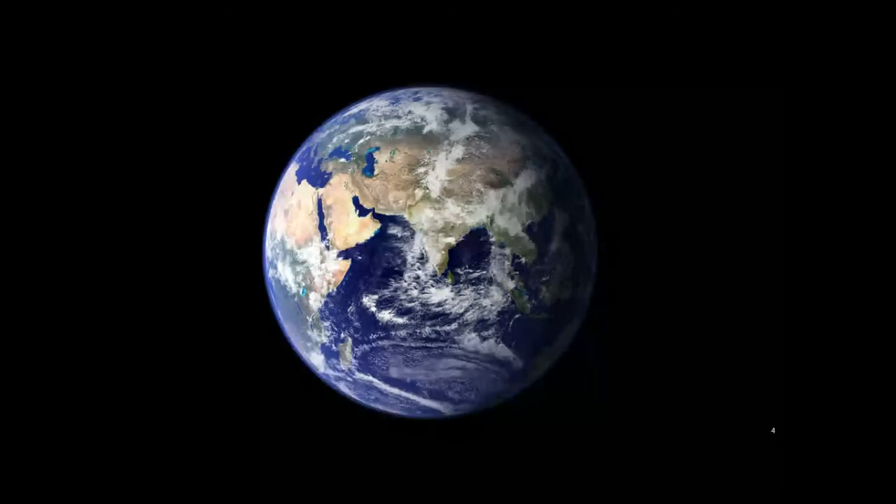So this is our planet in the solar system. It has the perfect conditions for life to arise, but it has not always been this climate here. In fact, there's a natural cycle between warm periods and icing periods. At 20,000 years ago, south of Europe had the climate of northern Norway today, and our ancestors were basically hunting reindeers. So you know this is the natural cycle between these changes of temperature.

Today, nowadays, we are facing a warming period, and the global scientific community is witnessing a fast rise in the Earth's temperature, since the industrial revolutions. So there is a link between our activities, mainly use of fossil fuels, and our emissions in the planet. But if we imagine Earth as a system, it can regulate its temperature, it has the ability to auto-regulate itself, like a negative feedback would do.

But only when there are minor disturbances. In the climate change and global warming, at some point the disturbances begin to be so high that the system becomes unstable, and they can have catastrophic impacts like pack ice melting, rise of ocean temperature, ocean acidification, the loss of regulation of CO2, and also the de-icing of permafrost.

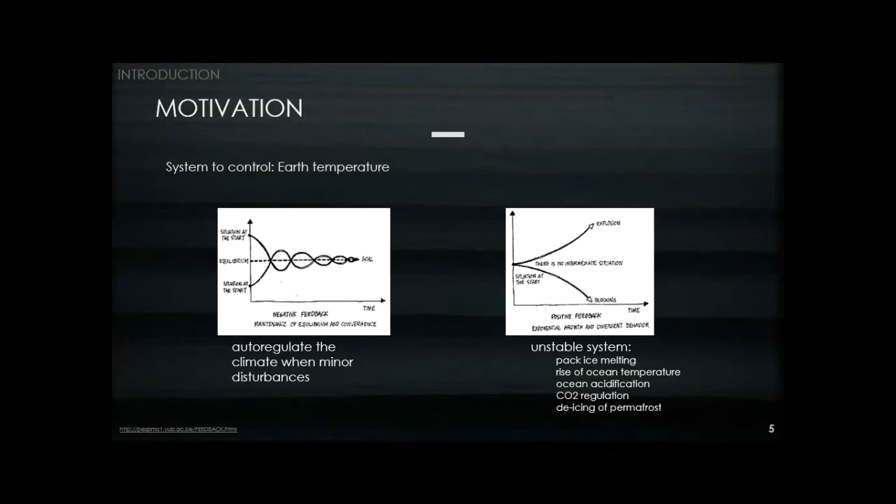The first one is sufficiency — don't use the energy you don't need. The other one is efficiency — you have to think of more efficient systems. And the other one is use renewable energies. So with these three principles, you can engage an energy transition.

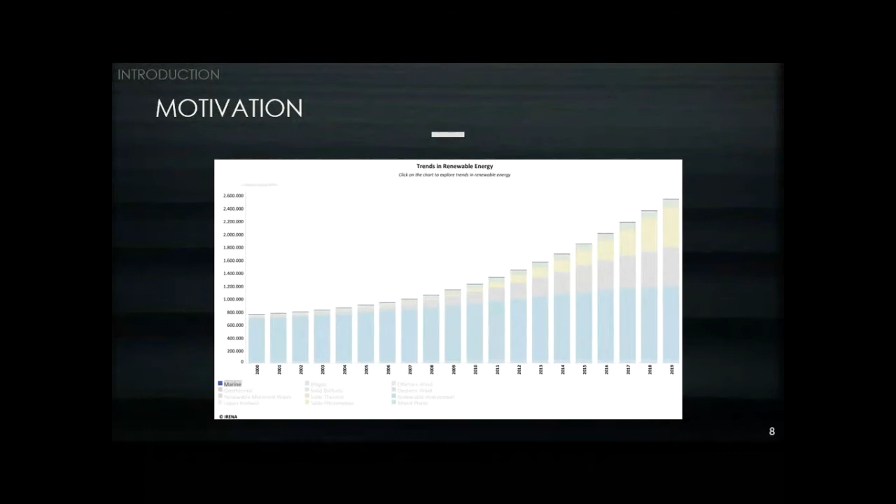So here, I think innovation is still ongoing, but it's more incremental innovation, and I think there is space for research and development in marine energies. So there is motivation to work in that field. In these marine energy technologies, we can think of tidal energy, wave energy, osmosis, ocean thermal energy.

The one I wanted to focus my work on is wave energy, because it represents a huge amount of power. The resource that is accessible in Europe can represent 3 times the European power consumption.

We know there's a huge amount of energy, and mankind has always tried to protect itself from ocean waves, building harbors or making more robust ships. So there are a lot of challenges here. First, we want to produce power, but it is usually associated with costly operation and maintenance. The devices to capture power have to survive winter storms, and they are also subject to corrosion and biofouling.

Now moving on to some generalities. What are ocean waves? Wave energy is a sort of solar energy, because the sun creates wind and the wind creates the wave. Here you see a picture of a swell wave, created by wind blowing over a large surface area far away from the coast. These long crested waves come to shore quite regularly. On the opposite, we see wind waves, which have a much more chaotic aspect.

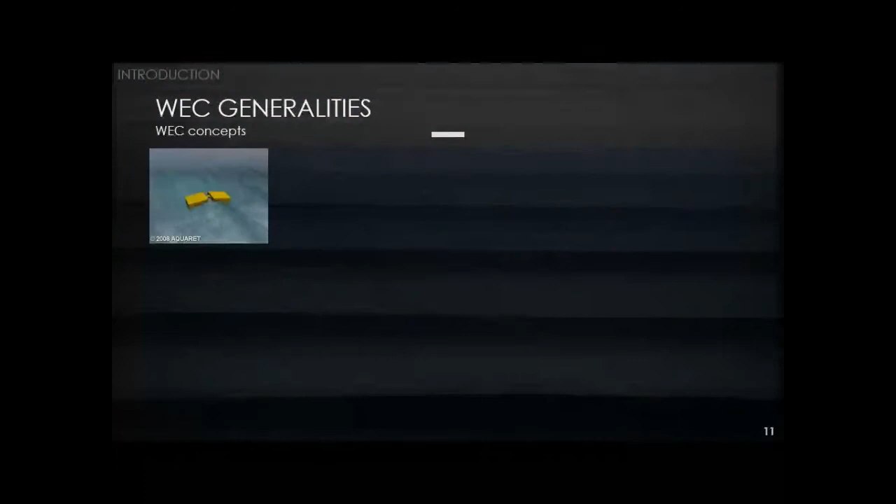There are several concepts that have been developed to capture this energy. You see first the attenuator, a flap type, a point absorber, one which relies on pressure differentials, pitching devices, overtopping devices, and other more innovative ones relying on a deformable rubber material. The one I wanted to focus my work on, due to its simplicity and robustness, is the oscillating water column. In this picture, you can see how it behaves.

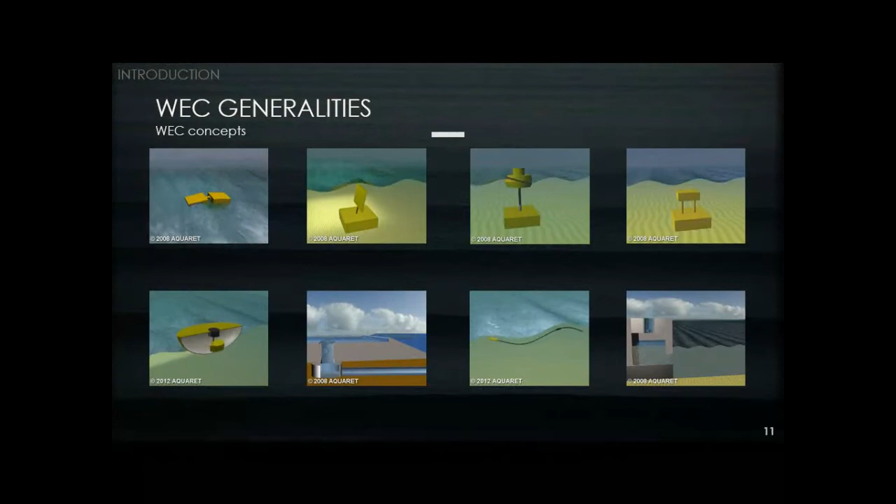What I wanted to state with these different concepts is that wave energy is not converging into a winning technology, like it's been the case in wind energy, where we now have the three blade horizontal axis turbine, which allows cost effectiveness and reliability. So there is still room for innovation here.

Now, moving on to the scope of that research, I wanted to introduce some concepts here. In wave energy conversion modeling - how the devices move due to ocean waves - we rely on concepts of hydrodynamics, which express the motion of the device and the several forces in presence, like the excitation forces, which is the one felt by the body due to an ocean wave, also radiation forces and hydrostatic forces.

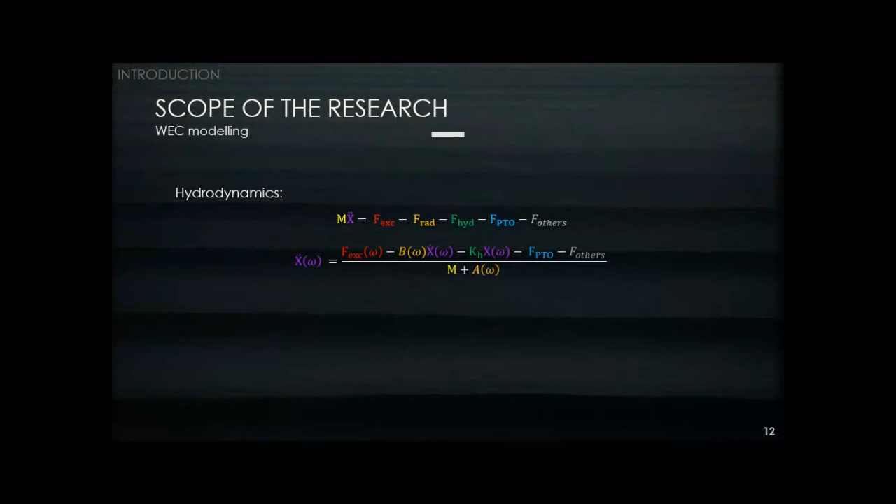There's also the power takeoff force, which is the one we actually want to capture and convert into useful power, and other forces which can be related to mooring forces and drag forces. This second equation is the differential equation of motion which relies on all of these forces.

What's important to notice here is a device has its own hydrodynamic coefficients. Here you can see its response in the excitation components, both amplitude and phase, and also added mass at infinity and radiation damping. These coefficients can be obtained by using hydrodynamic solvers like WAMIT, NEMOH, or AQWA.

When you solve that differential equation with a 1 meter wave for several frequencies, you can extract what is called a response amplitude operator, which describes the motion of a device. Here is an example of the Mutriku frequency domain wave device.

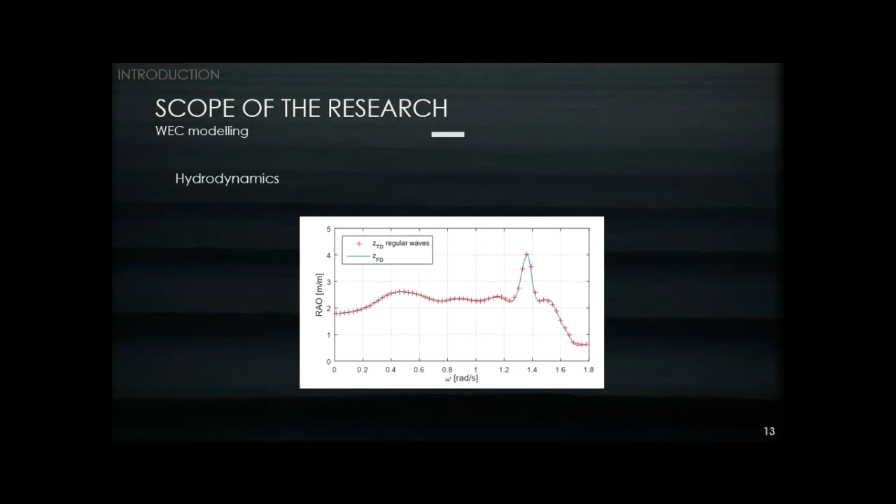Moving on to control for wave energy converters. Why do we want to control them? Well, of course, we want to extract power and optimize the energy output, but we want to do that while assuring safe and reliable operation. You can also apply control to assure good grid connection or integration of power into the power network. Earlier you saw the force we are trying to optimize, which is the power takeoff force.

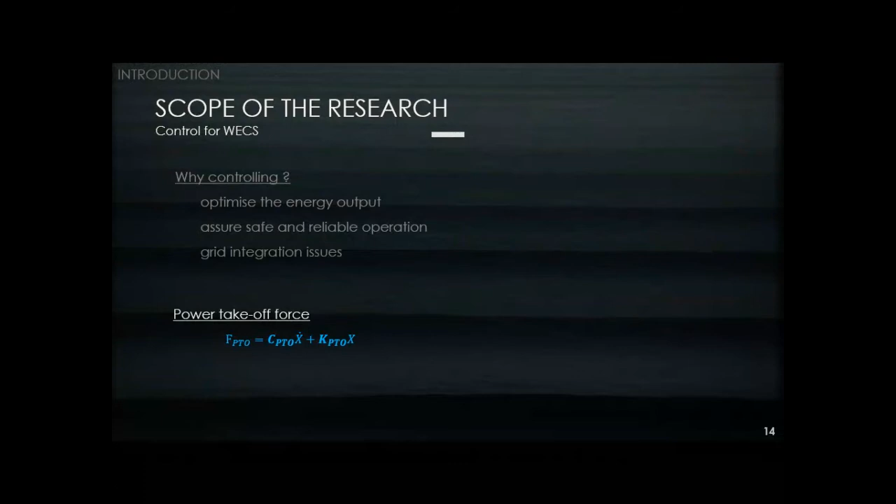It can be simplified as a damping coefficient, CPTO, proportional to the velocity, and a stiffness coefficient, KPTO, proportional to the position.

It needs a force in the power takeoff, which is able to give back energy to the system so it can change its motion and be closer to resonance condition. There's another control strategy called latching. It's phase control, and it also tries to change the motion to recreate resonance. There's also a passive approach, which is not very efficient.

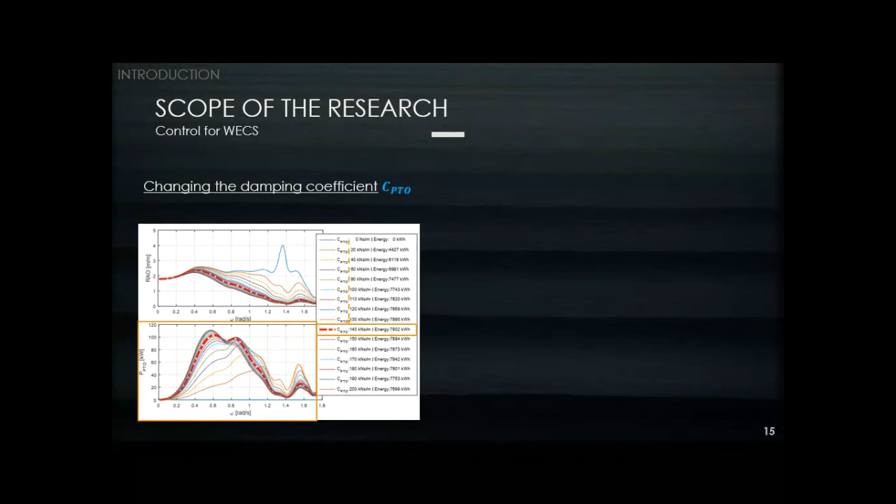What happens if we change the damping coefficient of that force? Remember the RAO of Mutriku, shown as the blue line—as you increase the damping coefficient, you decrease the motion and extract power, shown at the lower graphics. Globally, if you integrate across all frequencies, there is an optimal damping coefficient, and you can summarize this as an energy production.

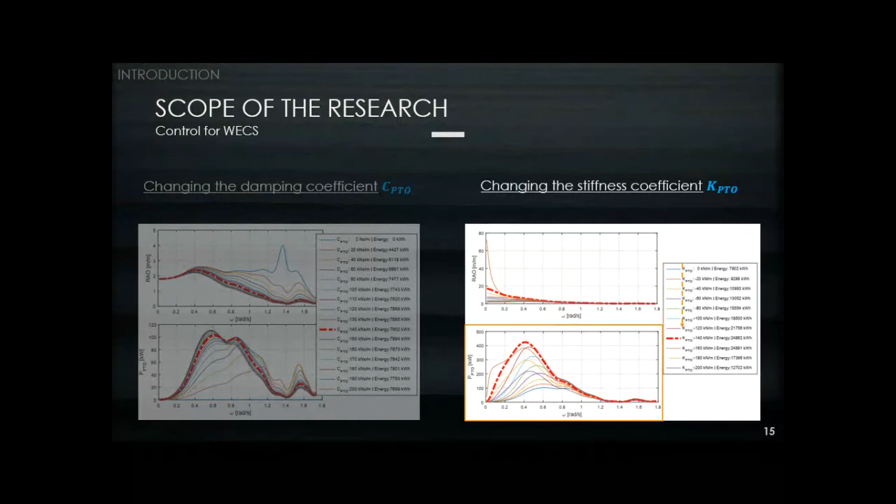And if we change the stiffness coefficient, the motion changes—there is a higher increase in the power production. The energy is, in fact, 3 times more important in that case. So what happens if you optimize both of these parameters?

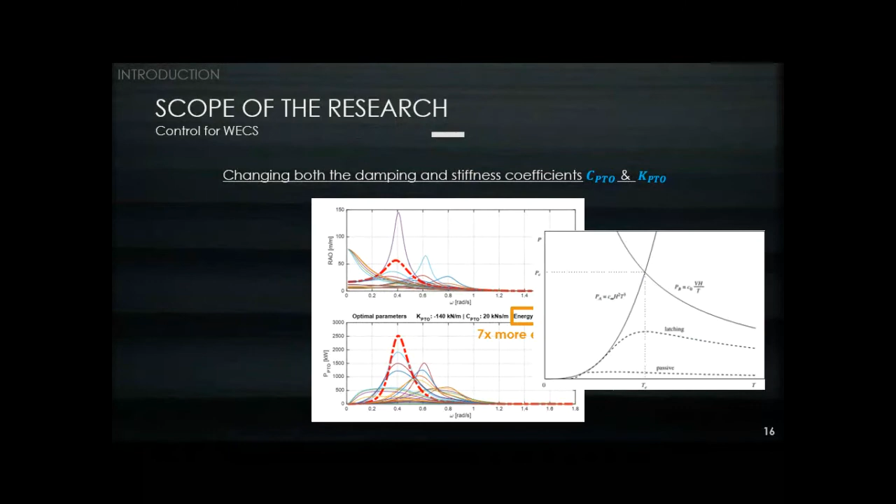The motion is way higher. For a 1 meter wave, at the resonant frequency, it can go up to 150 meters—not very feasible in practice—and the total energy is about 7 times more. You can see with this graph a parallel with the theoretical curves of maximum power extraction.

Next, control for the oscillating water column. Here you can see the several steps of energy conversion from the wave to the electrical wire—this is why we call them wave-to-wire models.

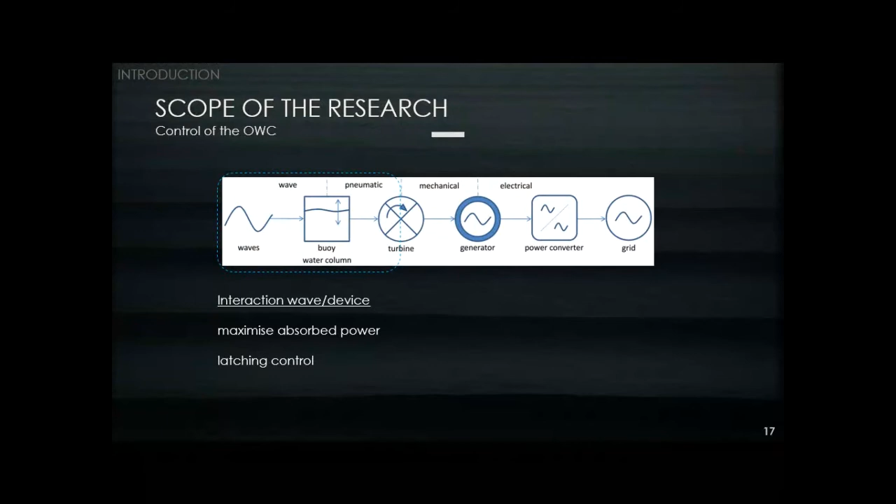Where can we apply control here? We can apply it at the interaction between the wave and the device, where we want to maximize the absorbed power. This can be done by latching control for the OWC—by actuating the latching valve, we induce a perturbation in the pressure and change the motion of the device.

We can also control the absorbed power to optimize energy production, which is done in the power takeoff—turbine and generator—using rotational speed control. Also, though not explored in this thesis, there is grid interaction control, where you want to increase the quality of power injected into the grid.

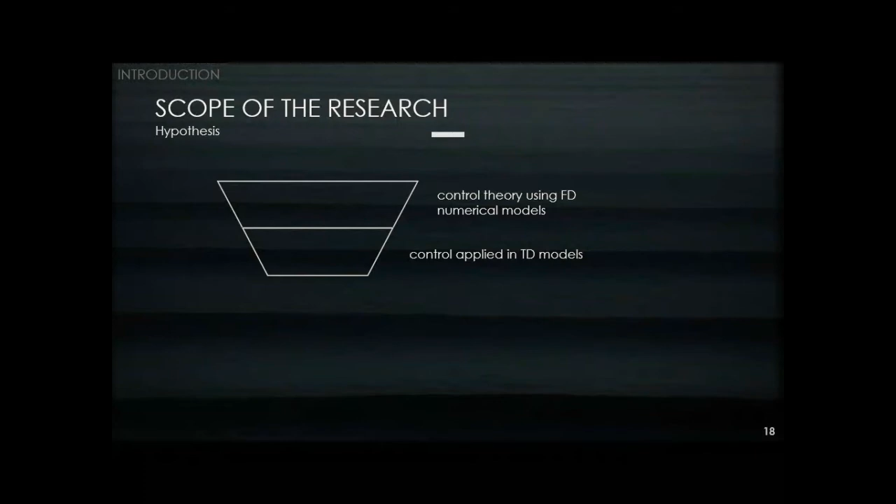Some hypotheses: I've seen many references for control theory applied to wave energy conversion, most often in the frequency domain, with several approaches for applying this control in time domain models. This is also the case for predictive algorithms, which rely on knowledge of the future incident wave and optimize control parameters for better power extraction.

But these algorithms, when applied to control for oscillating systems, are not that many. In fact, for real sea trials of that type of algorithm in real oscillating water column devices, I only know of one. So there is room here for innovation, and this is one motivation of this work.

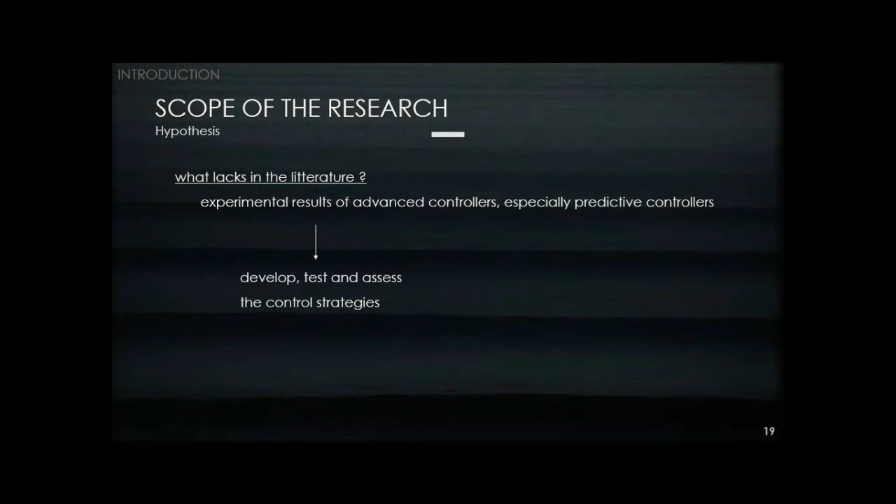It lacks experimental results for advanced controllers, especially predictive ones. To reach that, we need to develop these algorithms, test them, and assess them. To do that, we need accurate numerical models, and to reach experimental and sea trials, we also need to solve implementation issues.

The global objective of the wave energy sector is to lower the LCOE, the cost of energy production—the ratio between costs and revenues. Revenues are associated with the quantity of energy produced. So the general goal of this thesis is to optimize energy production through advanced control strategies, and to reach sea trials to prove these algorithms are actually viable.

In fact, we have some opportunities here in the Basque Country. We know that there is this device called the Mutriku Oscillating Water Column plant. It was grid connected since 2011, has produced more than 2 gigawatt-hours of wave power injected to the grid.

Also, a company named Oceantec, now acquired by Idom, developed its Marmok buoy, which was installed at the test site close to Armintza for two years and survived 3 winters. So here we can see there is room, or opportunities, for testing these algorithms on these two devices.

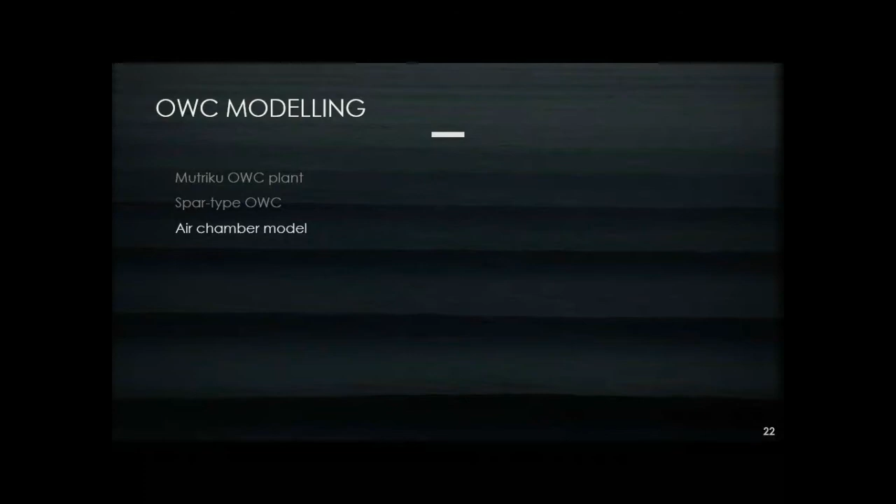Now we are moving to oscillating water column modeling. First we'll see the model of a Mutriku plant, then a spar type floating buoy, then the air chamber model, modeling of the power takeoff, which includes the turbine and the electrical conversion. This assessment or model can contribute to configuring the power takeoff elements and sizing them.

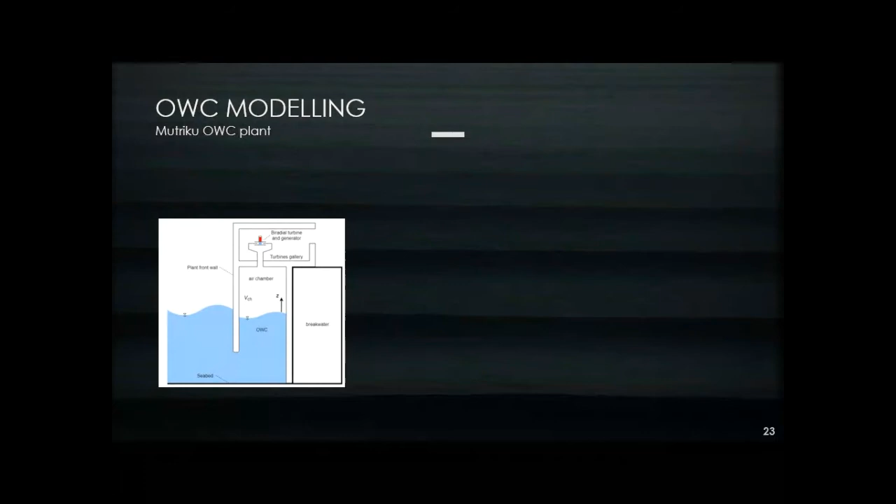Here we see an example for Mutriku. This is a side view of one chamber of the plant, showing the geometry of the plant and its surroundings, which was done to obtain the hydrodynamic coefficients. This was done by some colleagues in the OPERA project. What's important to notice is that it is important to take into account the surroundings of the plant to capture all the changes in motion. So seabed conditions are important, and neighbor chambers also - they are all integrated into that model.

What I did here is, from these hydrodynamic coefficients, create the time domain model. Here you can see the excitation force, how it is expressed, the radiation force, hydrostatic force, and power takeoff. The radiation force has a term called the convolution integral, and we have to use some methods to solve that - we'll be using the Prony method in that case.

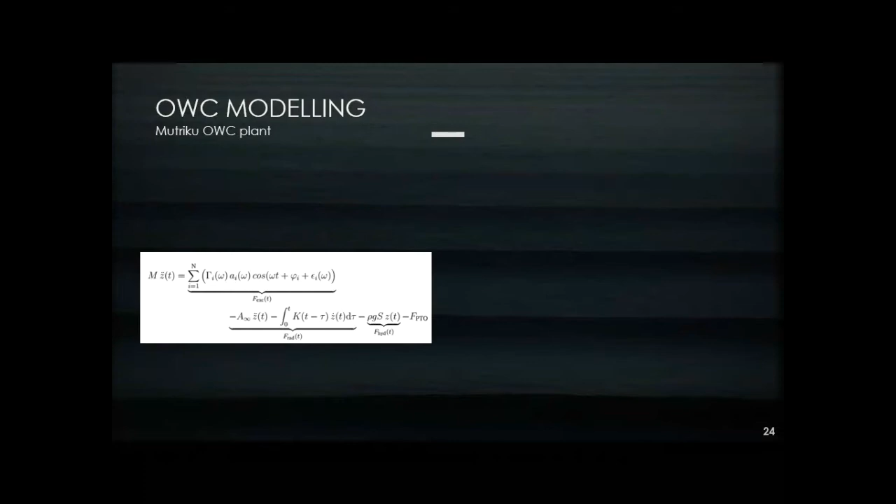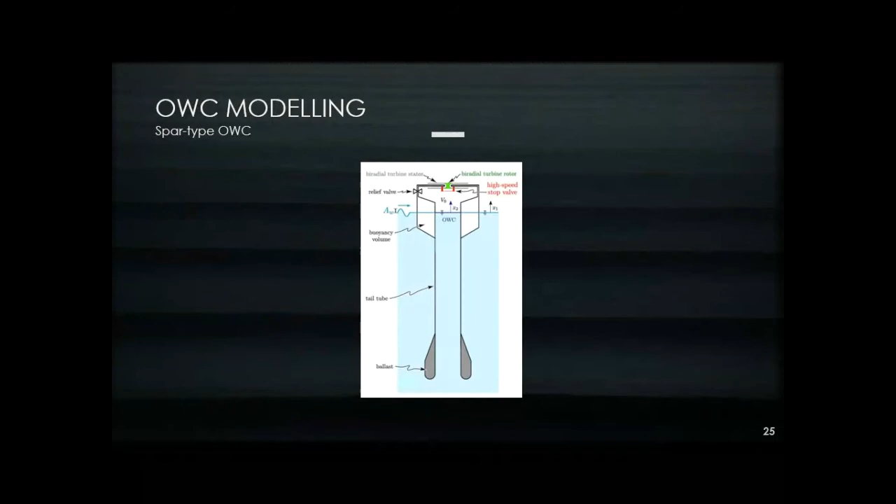Then moving to the spar type oscillating water column, here is a side view also. What's important to see here is that it has two bodies: one is the floater and the structure, and the other is the water column itself inside the device. In fact, it's the relative motion between these two bodies - each one has its own response, which creates, which absorbs the power.

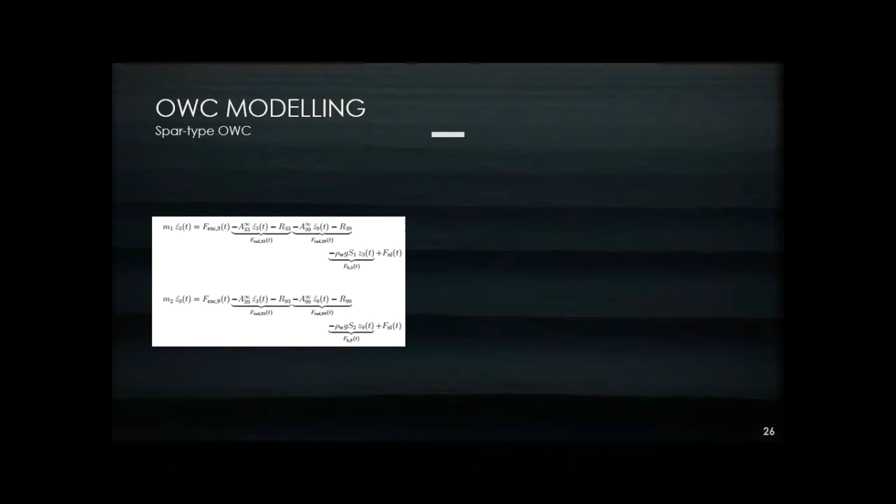So we solved the motion of the device, and now we are moving to the modeling of the air chamber. In fact, the force of the power takeoff for an OWC is the force of the pressure inside the chamber - the pressure variations multiplied by the area of the internal water surface, the oscillating water column. But this pressure is a gas, and you can assume that it is either incompressible or compressible.

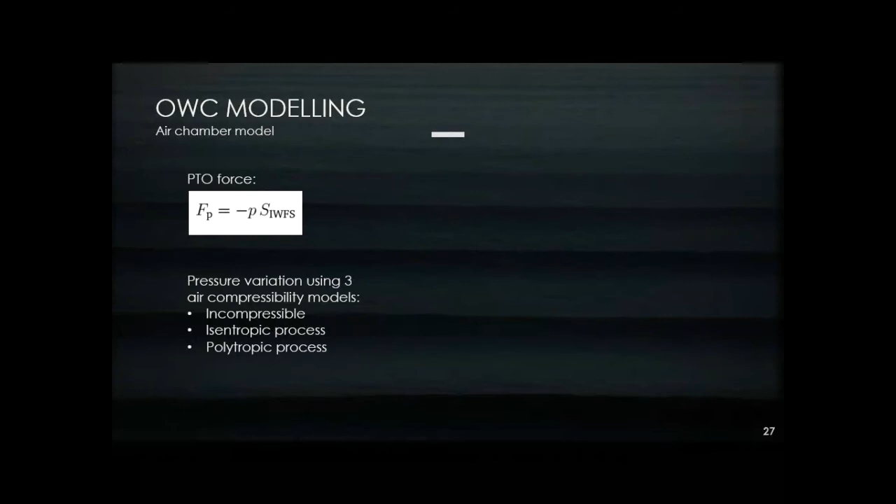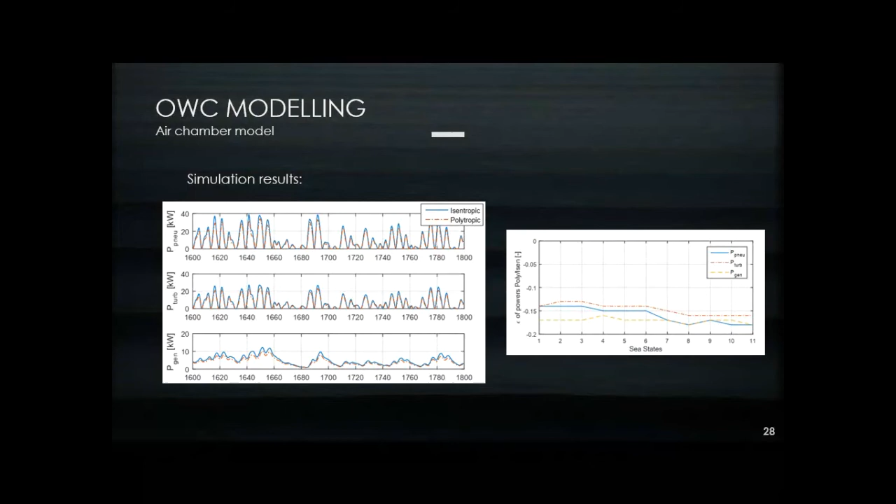Globally, when we do the simulations with several sea states, irregular sea states, we see that there is a reduction of the generator average power of between 15 and 20%. So it is important here to take into account air compressibility first, and to be sure that you are using the right model.

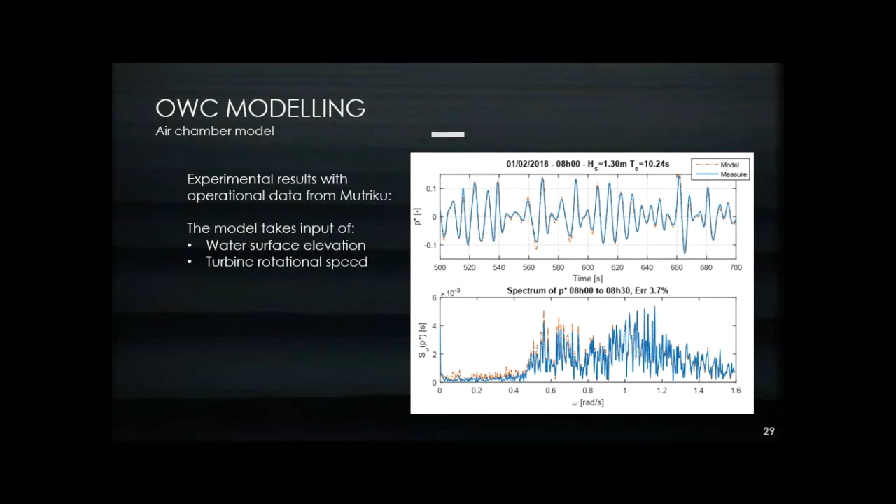Because we had access to the Mutriku plant, we wanted to know if this polytropic process was viable and a good solution to implement. We took inputs and measurements from the plant, and compared the pressure with the model we were developing. In this specific sea state, there is quite good agreement in the pressure variation, with an error of about 4% globally. This has to be extrapolated to several sea states as well.

So we solved the motion of the device. We saw that the pressure and the compressibility is important here. And now we are moving on to the power takeoff part, which is composed of air turbines.

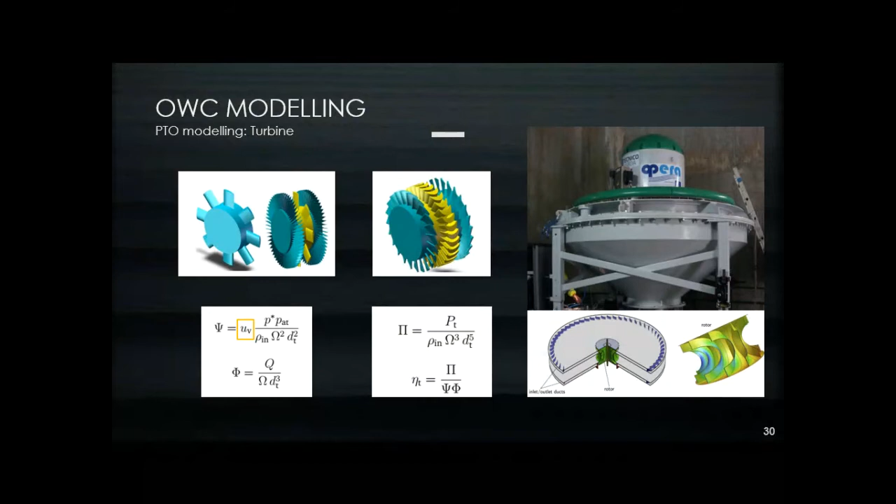This is all state-of-the-art, but I wanted to introduce some important equations here. There are dimensionless terms of pressure, airflow, power, and efficiency. For the pressure, the psi coefficient, there is an additional term, UV, which represents a safety valve set in series with the turbine. We actually close this valve when the energy is too important in the system, so it can be used to dissipate energy.

What was included in the model is a loss model of the electrical conversion at the generator. Here we are using an induction generator. The loss model includes mechanical losses, mainly due to bearing friction, iron core losses, related to the magnetic field and eddy currents in the laminated plates of the generator, and winding losses, which represent the heating and loss of power by Joule effect, related to the quantity of copper inside the generator.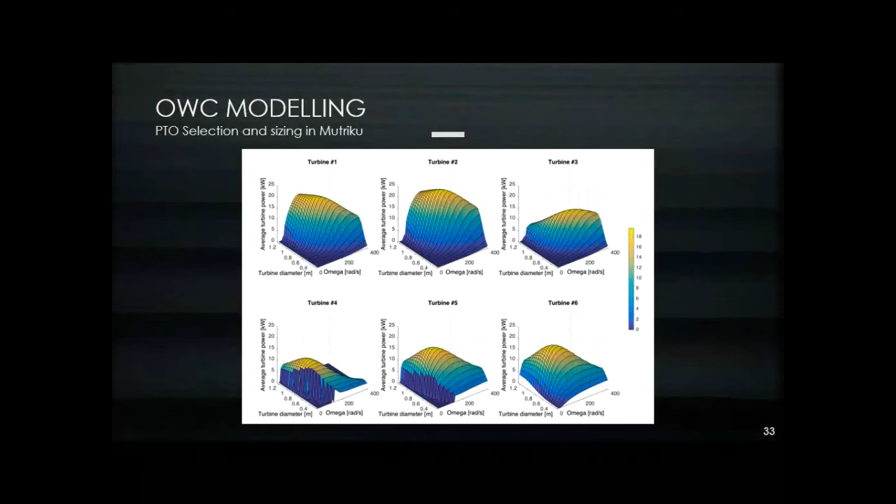And this is what the use of the safety valve is for. With that numerical model, we are able to configure and size different power takeoff systems. We see our 6 turbines, and basically you can optimize the turbine diameter. You will be able to know what rotational speeds you will be working on, and some power levels also produced mechanically. So it can help also to size the generator: number of poles, rotational nominal speeds, nominal powers.

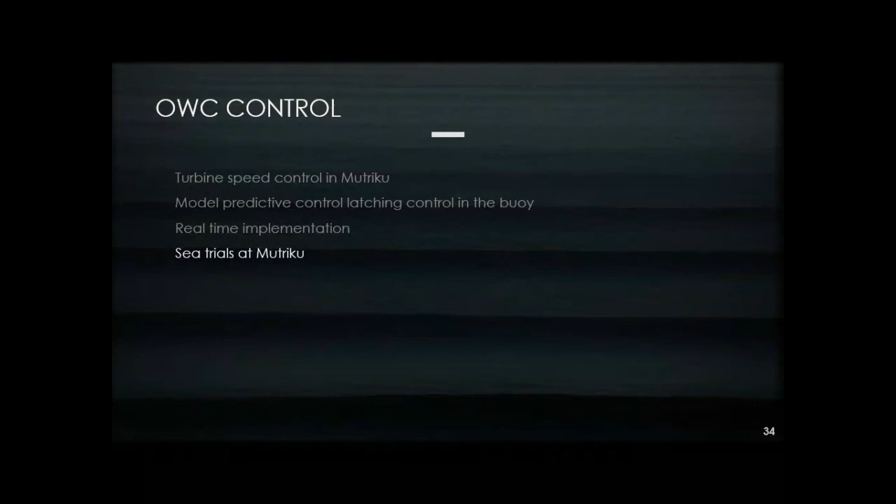Okay, so it's the end of the modeling part. Now we have numerical models for Mutriku and for the spar buoy, and now we want to introduce control concepts and contributions in the turbine speed control for Mutriku, using also a predictive controller for these turbine speeds, and predictive control for the latching control strategy in the buoy. We'll be seeing what is the approach for real-time implementation, especially for these predictive algorithms, and results of sea trials at Mutriku and experience learned, and then results at the BiMEP test site with the Marmok.

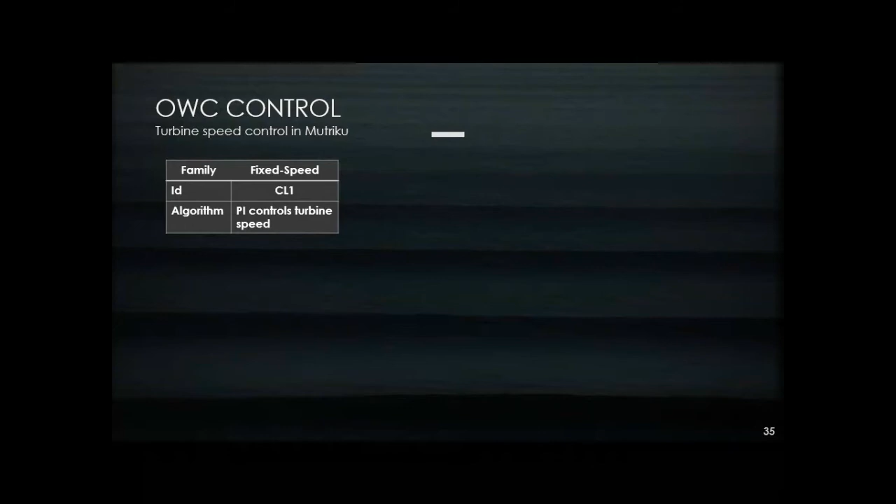So first of all, turbine speed control for Mutriku. The first, adapted from reference state-of-the-art laws, is fixed speed turbine control. Another family is variable speed, relying on a torque-speed relation, like in wind turbine technologies. Another one tries to improve the fixed speed, what we call the quasi-fixed speed, which relies on a PI controller to control the speed. The last two are nonlinear model predictive control, which can parameterize control parameters of the torque speed laws. But the first law, fixed speed, is sea-state dependent, so it's not very easily implementable, while the others are called adaptive controllers, operable in any sea conditions.

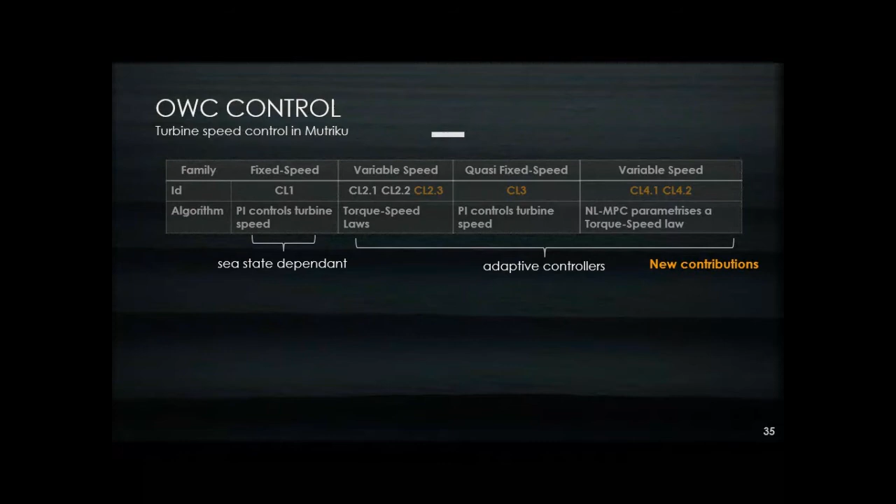And what you see in orange are 4 new contributions of that thesis. We will be using the Mutriku numerical model, and the power takeoff will be the one designed for Opera. I remember we had access to the Mutriku plant, and for a period of test during the campaign, we installed what we call the pressure sensor.

This pressure sensor can give us the wave elevation, and by a process we can obtain what we call a wave climate. So the wave climate is a scatter diagram, and you have a relation between sea states characterized by wave height and energy period. What I did was extract 14 most representative sea states with a wider variety of power, and these 14 sea states represent 50% of the global wave climate. In bold here you see sea-state number 10, which is not the most powerful, but is the most energetic one when you take into account the frequency of occurrence.

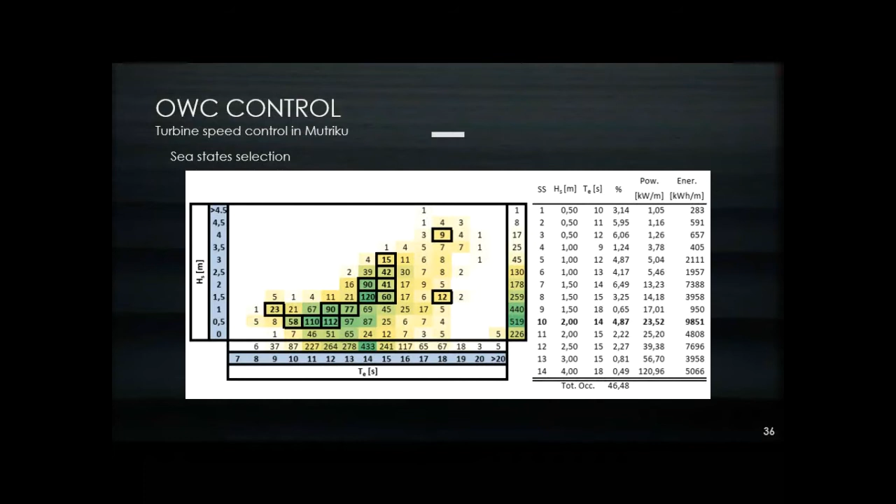You will see in some examples that this sea-state will be used to show some results, because it's the most representative.

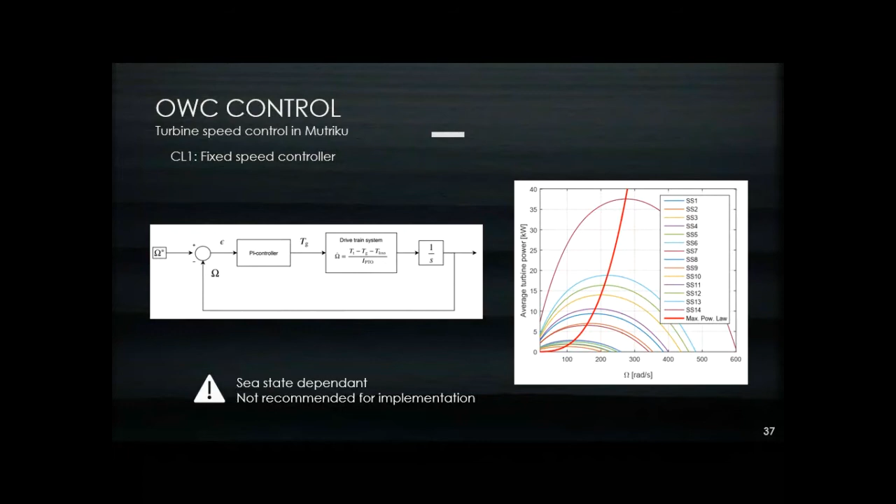Moving on to the first control law, the fixed-speed turbine control. It relies on one reference speed controlled by a PI controller. To find that reference speed, you need the numerical model and to perform an offline optimization, so for each sea-state you find the optimal rotational speed that gives the maximal average turbine power. This represents the damping coefficient in the power takeoff force we saw earlier, so there is an optimal power extraction. But remember this control law is sea-state dependent, so it's not very recommended for implementation, because you have to know the sea-state at each moment.

Now we want to move on to variable speed controls, the second family, the torque laws. Basically a torque law means that depending on the speed, you apply a torque to the generator, and these curves are characterized by slope coefficient A and an exponent B. The first and most basic law is based on the best turbine efficiency point, so you want to set the turbine at its best efficiency, which is associated with an optimal pressure, flow, and power. By playing with the equations, you can extract a coefficient KT, which multiplies the speed squared.

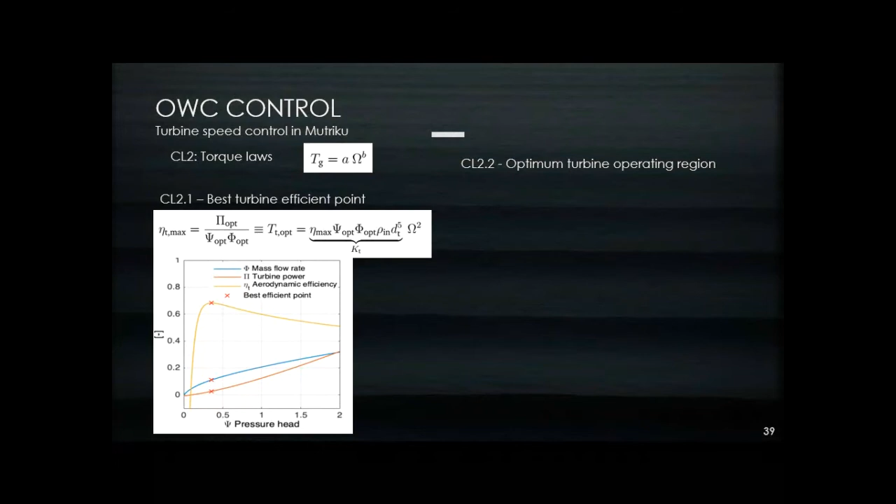The second law is, in fact, derived from when we performed the optimization for the fixed speed, where we saw there was an optimal speed that gave the maximal average turbine power. When you join all the dots, you get this red line, and you can extract the A and B coefficients of that curve to characterize this law.

So CL21 and 22 are based on maximal or turbine power extraction. But what happens if we focus more on the generator operation? Here is a representation of these three laws.

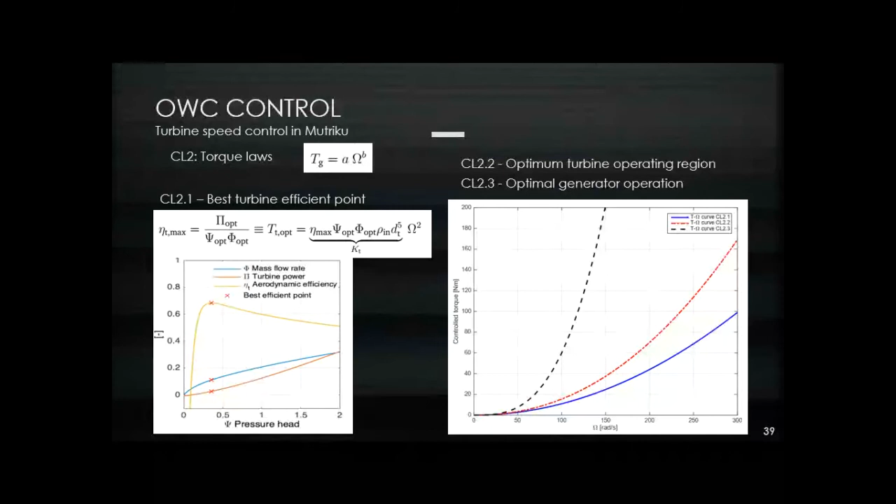The first two are the blue and the red, and the black one is the one that is more optimal for the generator. The power takeoff we'll be using has a nominal speed of 150, and we want the curve to go until its nominal torque, which is around 200.

And there is, in fact, an actuation of the safety valve, so it has to dissipate energy.

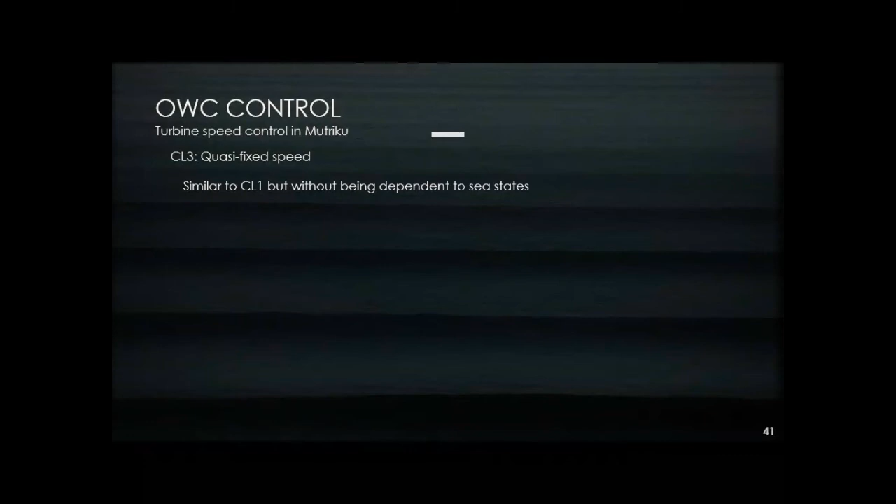Okay, now we are moving to what we call the quasi-fixed speed law. It is similar to CL1, but we want to solve the issue of the dependency of the sea states. So we have to find a way to change the reference speed, but with process variables or with operating variables.

And here we are using pressure. When we compute that pressure and include it into a sliding standard deviation, it's a moving window of about 3 minutes here. We can obtain the standard deviation. We multiply that by a certain gain, and we obtain a reference speed. This is what is shown in this equation.

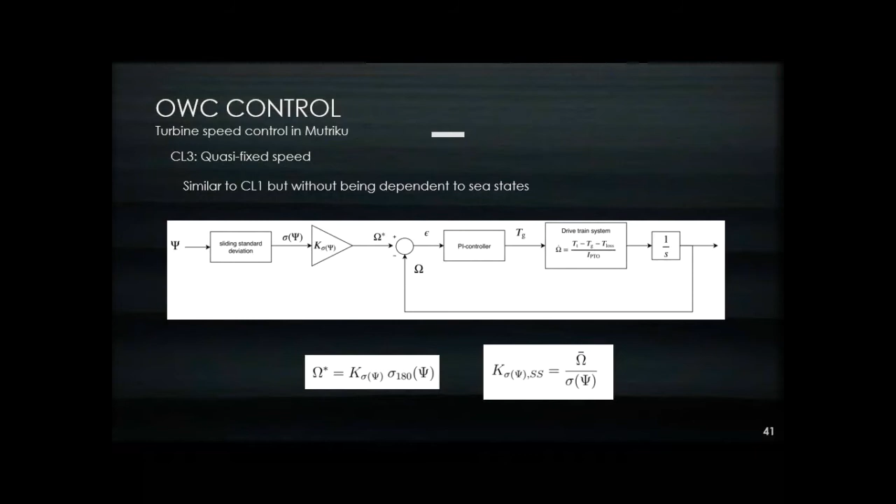And in fact, this gain is obtained by the optimal parameters that were extracted earlier offline with the offline optimization. And we make the average of this gain for all the sea states, and you're done.

Here are some simulation results. You see that in comparison with the fixed speed law, there is a change of the speed, both the reference and the feedback speed, and it has a more stable shape than with the torque laws.

And what we can see here also is that this change of speed reference quite follows the energy of the set of waves coming.

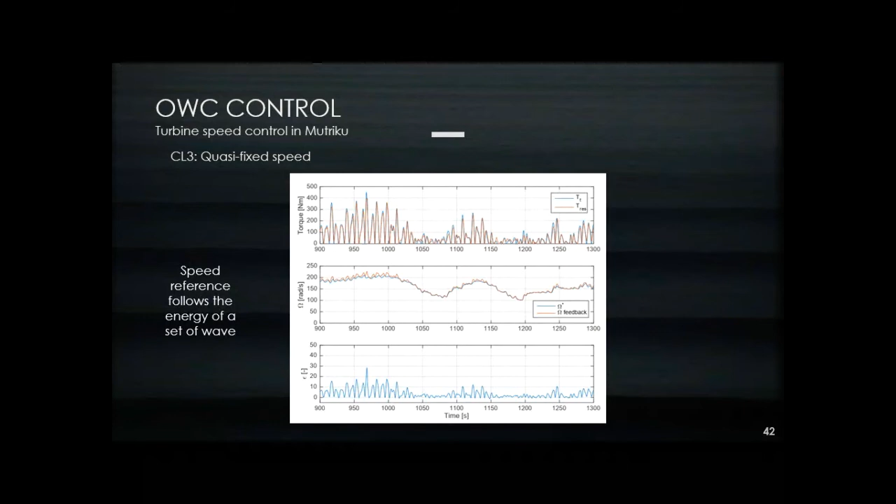Okay, now we are moving to a nonlinear model predictive control that has been developed in that work. You know that it can adapt and process optimization using future wave excitation, and the numerical model that has been developed with all these nonlinearities, with the air chamber, the turbine efficiency, generator loss model.

This graphic here shows the process and the approach for the optimization. In fact, at a certain point, we trigger the optimization over what we call a prediction horizon, which is around two wave periods.

And during that time, we optimize the control parameters, A and B, slope and exponent, so they will characterize the torque speed curves. We do that at each replanning period, and the replanning period can be basically half of the prediction horizon.

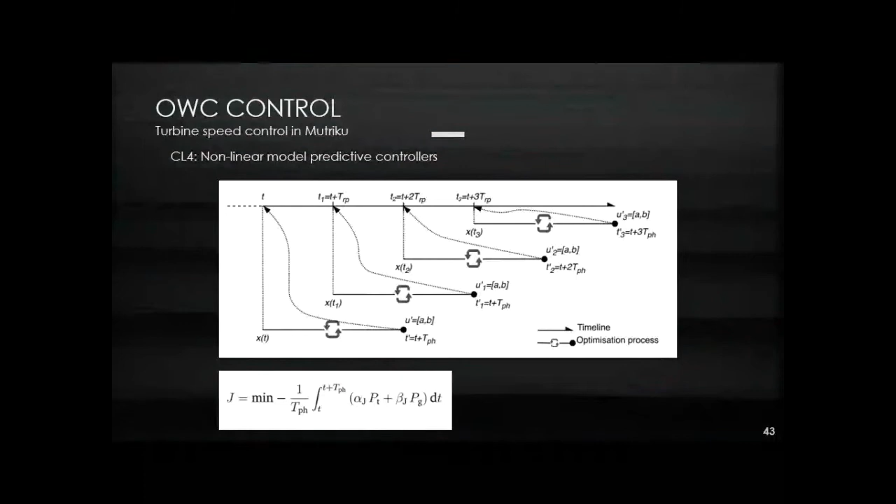To perform this optimization, what's important to have is the objective function. Here we want to maximize average powers, not only for the turbine or for the generator, but both of them. You see here there are weighting coefficients, alpha and beta, so we can set more importance to the turbine or the generator conversion.

And we wanted to include additional constraints in another version of that law, because we witnessed that these controllers were always tending to maximize the power extraction, and we wanted to include additional concerns of reliability for the components in the power takeoff.

So here the same, we see a time series of simulation results for these two versions of the model predictive control. The generator torque simulation results are the same for a certain period of time. What you see on this orange box are the different approaches, and the fact that at some point the second version tries to lower the power extraction and dissipates energy by the use of the valve.

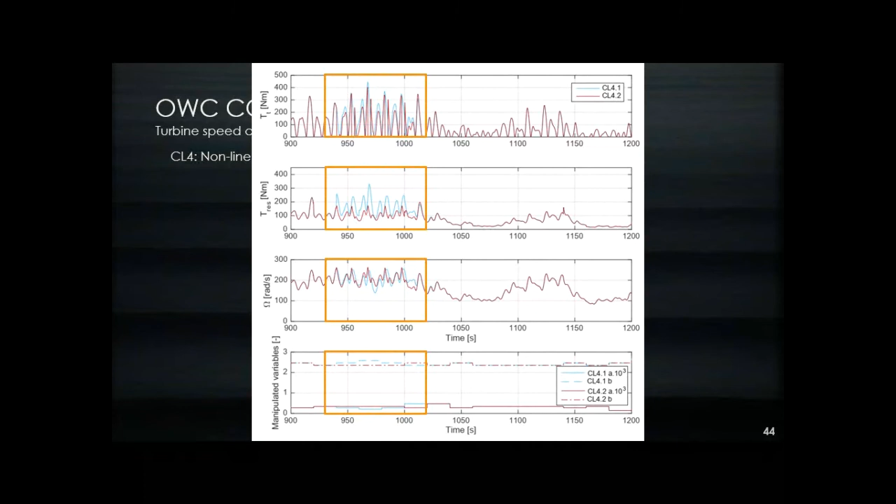This is done to have a better reliability score. Here you see the A and B coefficients' evolution: at the beginning they are the same, at the end they are the same, but there is a change of approach between these two controllers. The first version always wants to maximize the power extraction, while the second one has additional concerns on the component's reliability.

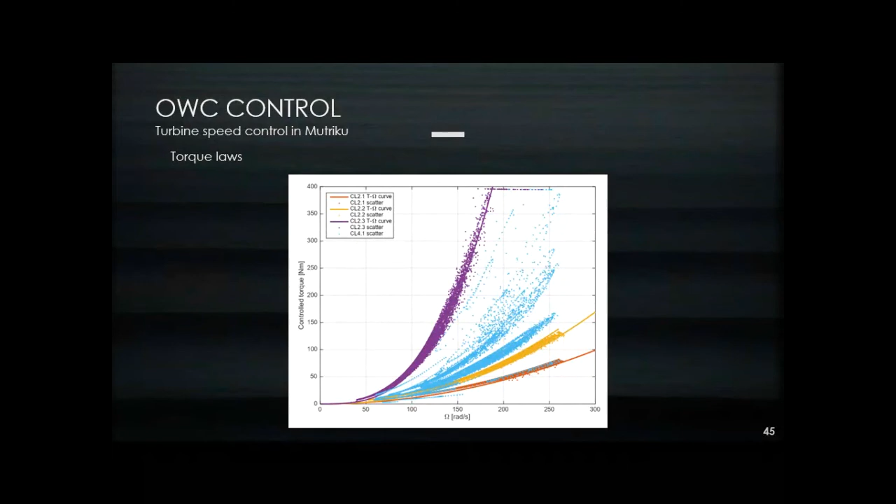In this picture you can see the four torque speed approaches. Three are the torque variable speed families based on offline or generator consideration, and the blue dots are several shapes or torques of the predictive controller. You see it can populate a wider area while the other controllers are quite static, so it can adapt to both external conditions with the waves coming and internal conditions, because all the components and the motion are taken into account.

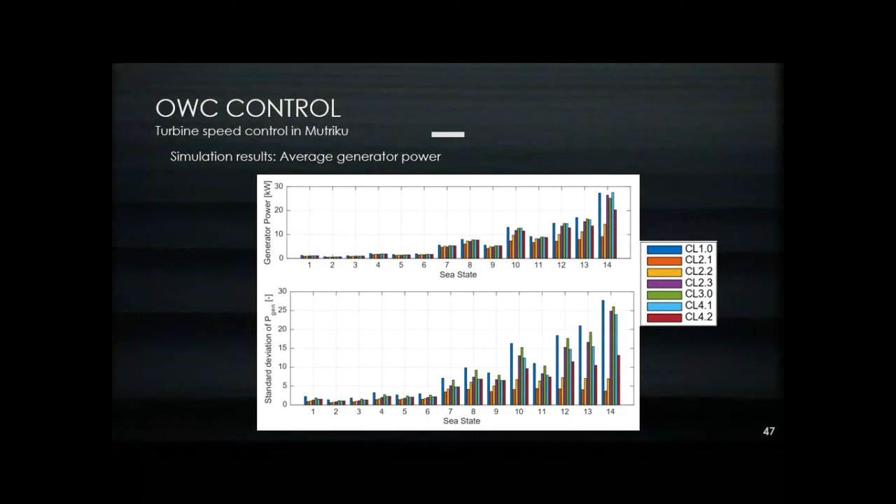But also I wanted to include here some score or reliability score, because when we compute the standard deviation of the generator power, this means we are taking into account power peaks in the sea state. We see globally that some controllers have additional concerns about power takeoff components, and the second version of the predictive algorithm divides by 2 the standard deviation in comparison with the first version. So it is effective and working as we expected.

Now closing the chapter of speed controllers, we are moving on to the implementation in simulation of predictive latching control, which is based on pressure thresholds. We are using the same algorithm as previously, but instead of optimizing the slope and exponent, we want to optimize pressure thresholds.

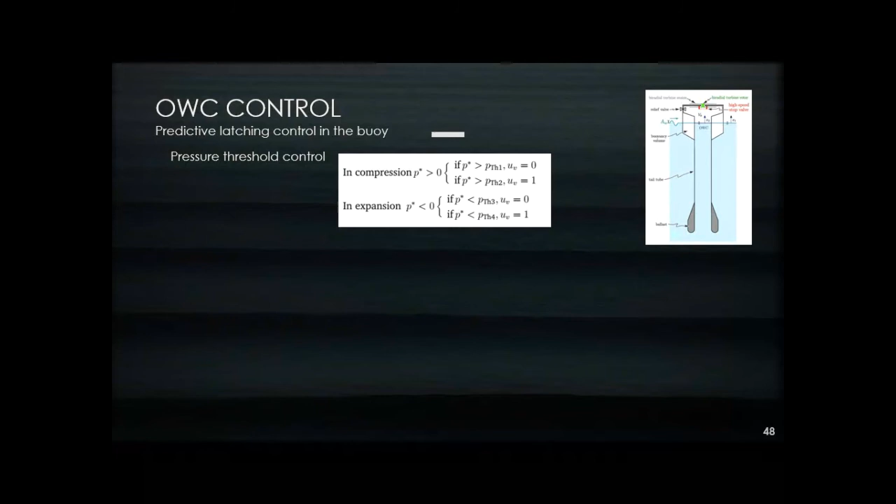When there is pressure variation, when the pressure goes over these thresholds, it will order the valve, the shut-off valve in front of the turbine, to close and open. By this opening and closing, we were able to change the motion of the device, and this is what we want to prove with that algorithm.

We saw there is an effect on the pressure, and we want to see if it also has an effect on the motion. So we take here the excitation force and the relative velocity between the two bodies. If you remember, to create resonance conditions we want the phase of the excitation force and of the velocity to match, and this is what is shown on this graphic.

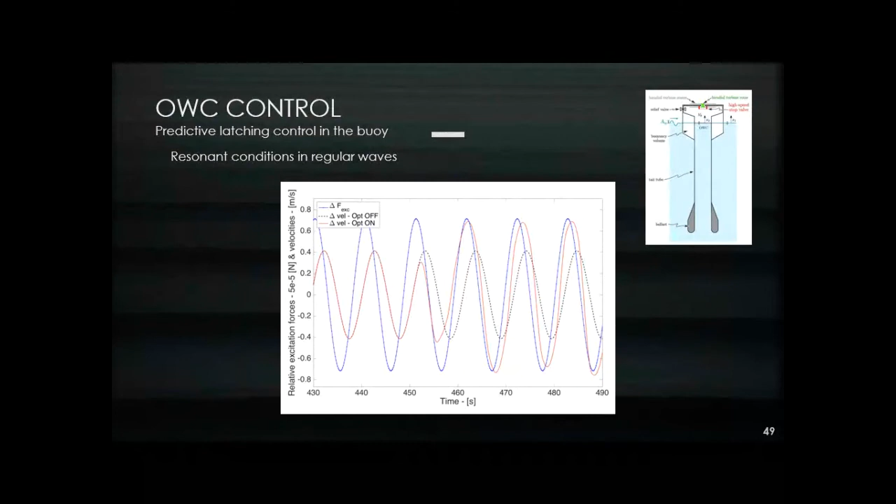The red curve is when the latching strategy is on, and there is a change of phase. It becomes closer to the excitation force, and we also see an increase in the amplitudes. So in theory, with these regular wave simulations, we see a huge increase in power production.

But when we go to irregular waves, there is still an increase, but not as important as we expected. Globally, taking several systems, we see an increase in the generator average power of around 6 to 25%. So there is still an increase, but you have to balance between the complexity of the algorithm and the results here. So this algorithm was not selected to test in real sea conditions.

So now moving on to the real-time implementation.

So to make sure that we can bring the model predictive control into Mutriku and BiMEP, we want to make sure that they will work properly. So for that, we are using a test rig, a test bench to perform the validation. Basically, the test bench used is composed of two electrical machines, a motor and a generator.

From one side, there is what we call the emulation of the device, so the motor will provide the torque similar to the turbine. And on the right side, you have all the real components in the power extraction, which are the generator, the power converter, and the control unit.

This was based on xPC Target configuration, so we could easily play with our numerical models and make some tests in this infrastructure. The implementation of the predictive algorithm was done in an external PC that had connections with the test bench to avoid overloading the control unit. This is a picture of the real setup in Tecnalia that was used.

We need to adapt the numerical models because the real components we will be using have capacities, nominal speeds or nominal powers that are different from the ones in the test bench. So we need to apply a scaling approach. We are using Froude scaling because it is the scaling methodology which relies on gravitational forces and their presence in wave energy conversion. So we need to compute that scaling coefficient and adapt it for quantities like speed, torque, and inertia.

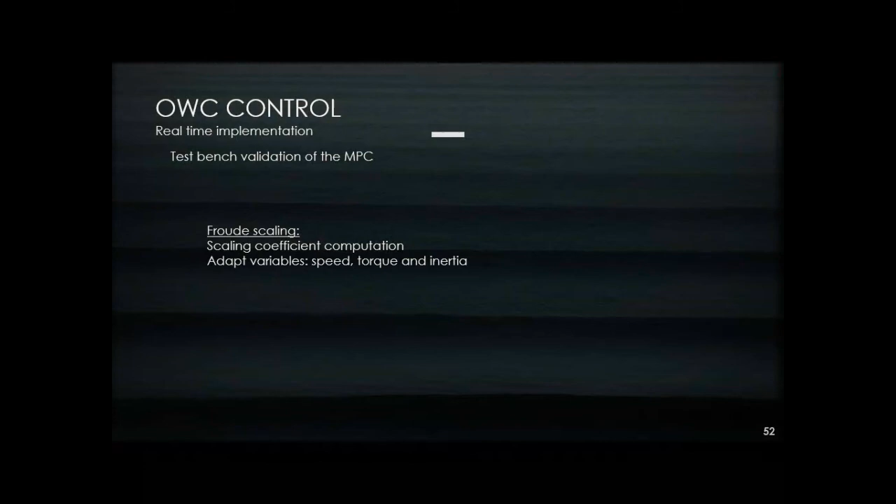To perform the validation, basically we have the same numerical models running in parallel. One will be strictly simulated, and the other one has input and output to the test bench. So we are able to compare the results, both experimental and numerical.

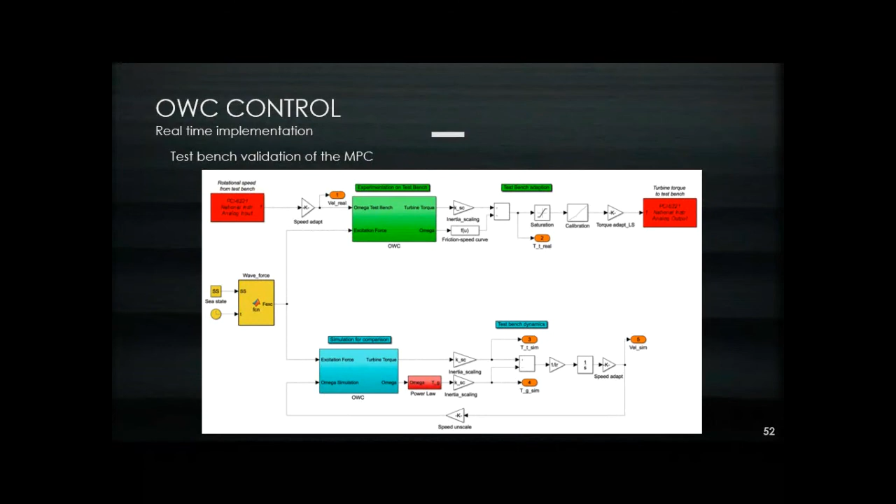We wanted to make sure that these changes were viable, so we made plenty of tests, and we saw that this working operation did not affect the generator. So now we have the controller validated. We know that it works in a control unit. We know that it will not be harmful for the system. So we are now moving on.

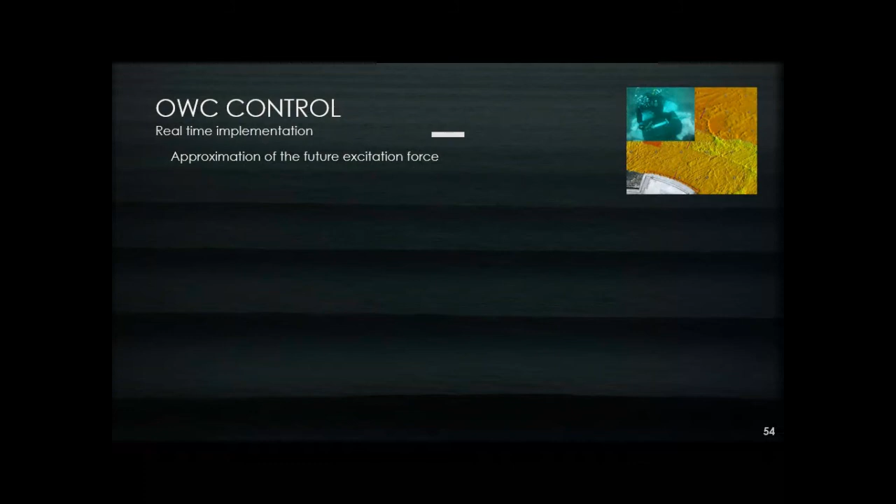We have another thing to solve, which is the excitation force estimation or computation, because we need this excitation force so the model is then able to apply its optimization process. So we need to compute that excitation force.

In Mutriku, you remember we had this pressure sensor installed in front of the plant. So we know that we can have the value of the wave elevation, and we connected this value and integrated it into the control unit, where we can compute the excitation force.

In the literature, we see that this computation of the excitation force in time domain is a convolution between Kx, which is an impulse response function for the excitation, and the wave elevation. We see it's the same as for the radiation. There is a convolution integral to solve, and we are using the same method as explained earlier.

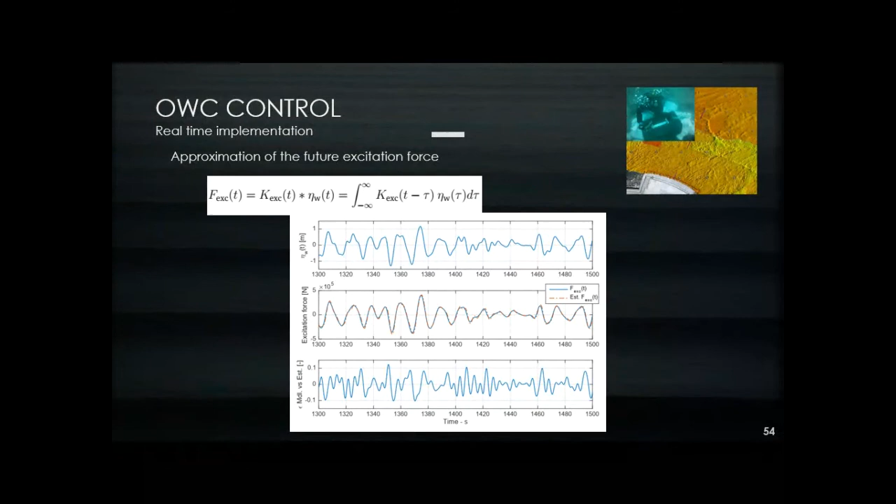Here is a graph about what validates if this approach is correct, and in fact it is. You see that there is error between the modeled excitation force and the computed one, which is around 10 or minus 10%. So it actually works.

Now we solved all that issue of implementation, so we can move on to the Mutriku power plant, implement all these algorithms, and in fact we were able to test for 2 weeks in June 2018. This was the sea states that were present during that testing campaign. Well, June is not known for its highest energetic sea states, so we were witnessing waves of between half a meter and 1 meter.

But still we had the chance to test over 325 half-hour tests, and we wanted to compare the torque-speed law, the simple torque-speed law using this maximum power law you saw, and the predictive controller. So the procedure was to run one algorithm for half an hour and change to the other one for another half an hour, and so on. So we were capable of having the same sea states within 1 hour, basically, and we were able to compare them.

Talking about the predictive algorithm, we need to initialize the prediction horizon time and the replanning period. We know that the pressure sensor is static, and we know the distance between the two, but we need to compute the maximal predictive horizon, so the maximum time we have for the process.

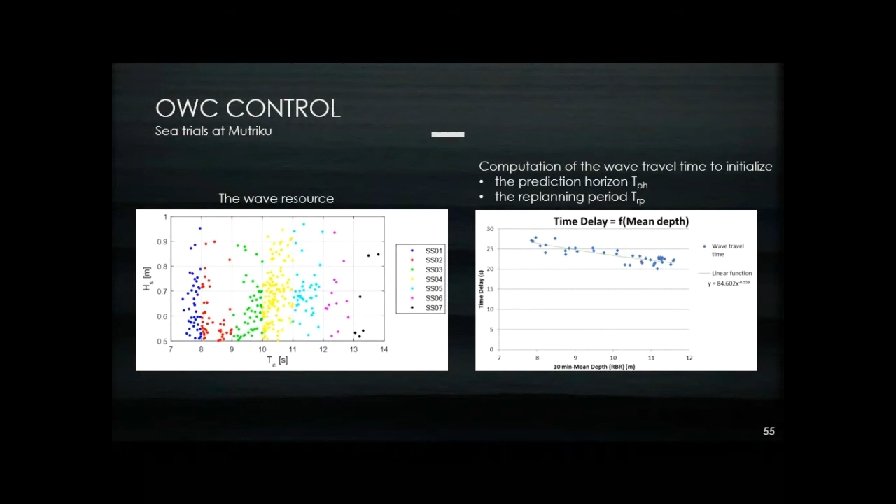When there is a change of tide level, because we are quite close to the coast, the travel time of the wave can change. Here is a way to compute the time delay as a function of the water depth.

We were also able to compare and validate the numerical model with the process variables, because we had values from the numerical model with the implementation process, and measurements from the sensors. Here there are three variables of importance: the velocity, the position for the motion, and the relative pressure. You see that the model underestimates some of the values, so there is still room for improvement.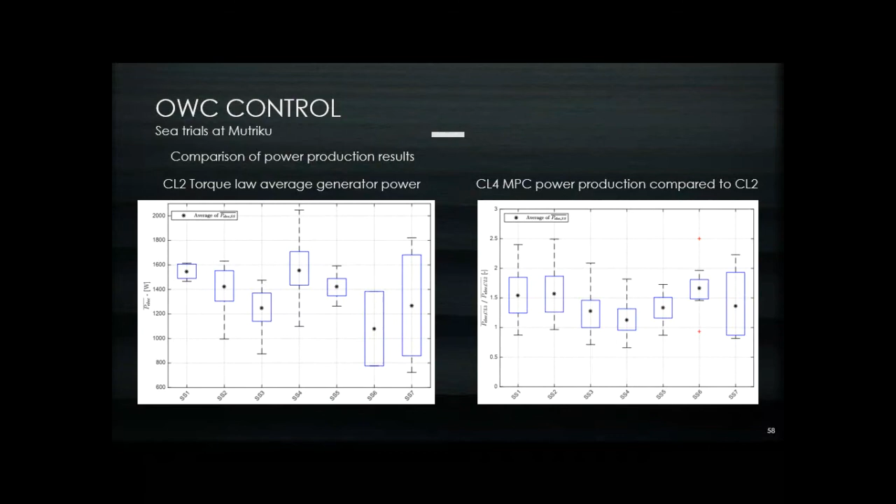If we focus not only on the power extraction but on the efficiency of the power takeoff components, we can see that the simple torque law tries to optimize the turbine efficiency. Here you see several dots, each representing a half hour test, while the predictive MPC tries to focus on the global power takeoff efficiency.

This is why the production is higher, because it takes into account not only the turbine or mechanical energy, but all the components of the power takeoff. This is a major improvement.

We know that results were encouraging in Mutriku, so we had the opportunity to test at the BiMEP site with the Marmok buoy. Here is a bit of the framework of the test.

We have a wave buoy situated in front of the Marmok buoy, and it can send wave elevation to an onshore computer. This onshore computer performs the optimization process and can send the A and B coefficients to the PLC.

There is another version of the MPC, developed in collaboration with partners from the University of Sevilla, which puts this optimization algorithm directly inside the PLC. We actually managed to do it.

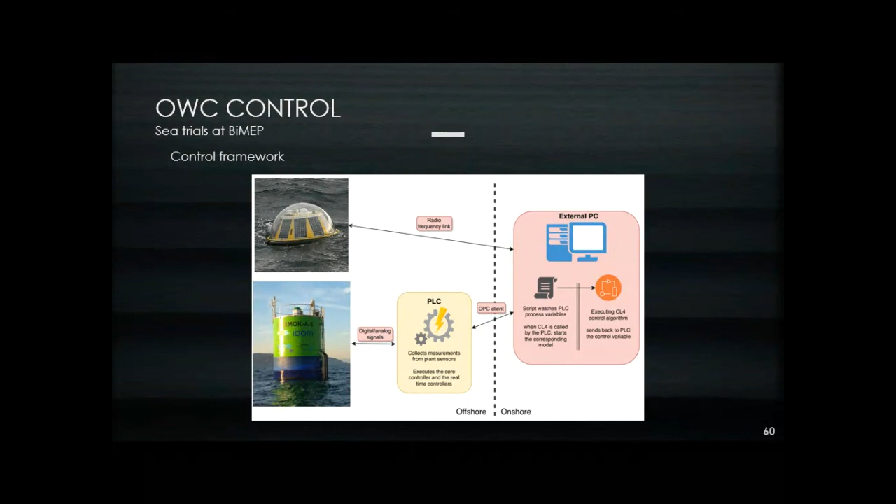Same as before for Mutriku, we need to know the distance between the wave buoy and the Marmok. This is done by computing the distance between them using GPS position. We also know that the velocity of waves, phase velocity, can depend on the water depth and the wave period. At each beginning of the test, we computed the phase velocity to obtain and initialize the prediction horizon and the replanning period.

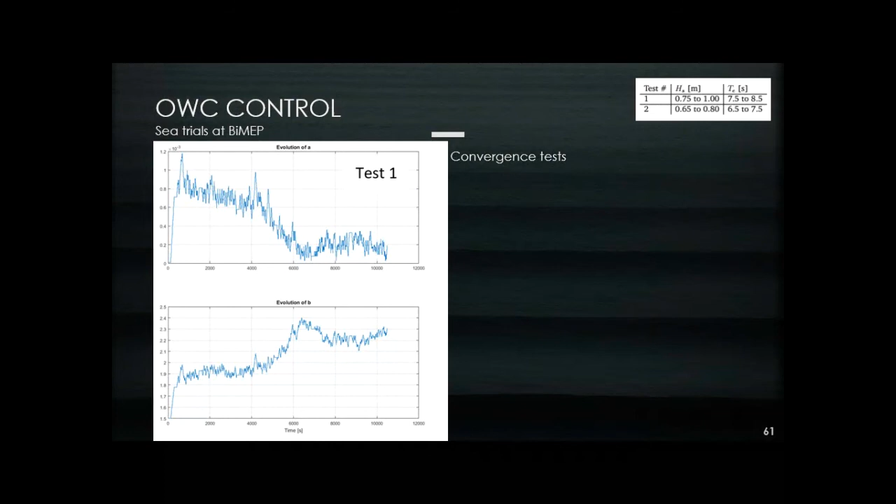Same as for Mutriku, we wanted to make a convergence test. Here you see the evolution of the control parameters for a 3-hour test, and another for a 5-hour test. What I forgot to mention is that these tests were run during June, but one year later, in 2019. We were not lucky to have a wide variety of sea states, and the majority of sea states were around 1 meter.

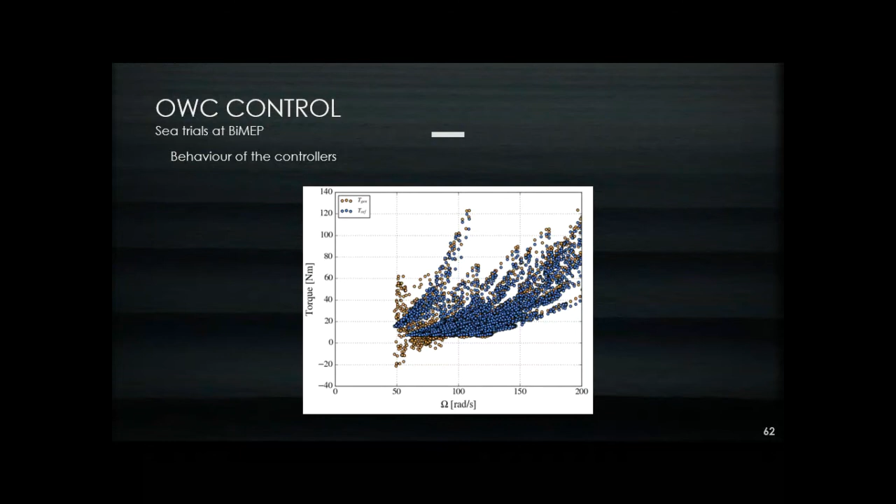The same as before, we wanted to highlight the fact that the MPC can populate the scatter diagram of the generator torque as a function of the rotational speed. So it proves that it's not static, it can adapt to the conditions. That's a good improvement.

When focusing on performance results, for the tests in the Marmok plant, developed by a company, we had some confidentiality issues and could not show the results as a function of sea states. But what we did have as a result is average efficiencies as a function of Hm0 values.

As a summary of the contributions, I would say that we managed to develop what is today the most accurate numerical wave-to-wire model, because this is what is in the literature.

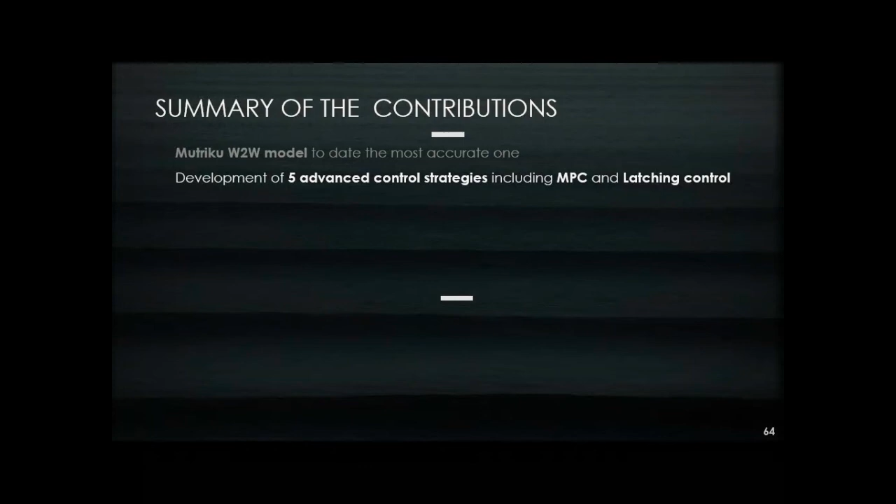We were able to develop five advanced control strategies, some based on MPC algorithms and also one with latching control. We were also able to provide critical assessments taking into account both performance and reliability, and we saw the first real-time implementation and sea trial results for predictive control algorithms in turbine speed control.

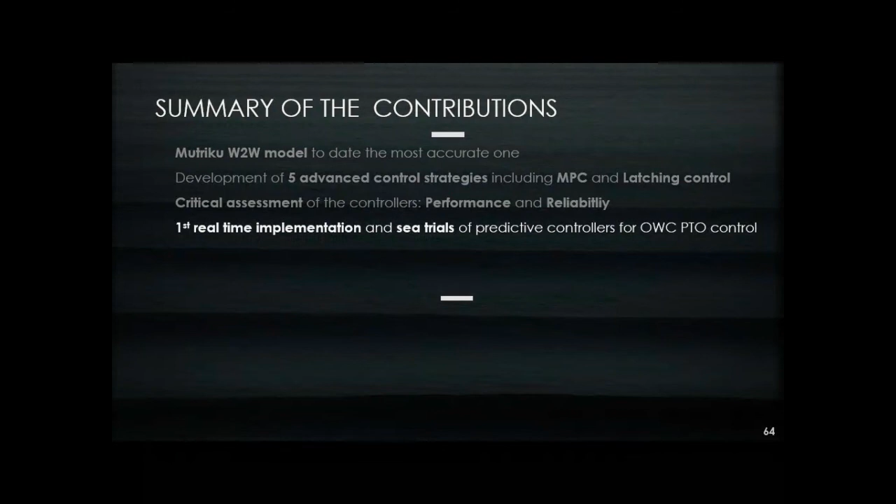To conclude, we noted that there was a clear need for accuracy in the numerical models, especially for the predictive controller. We need to have the best accuracy with nonlinear terms or concepts like compressibility and power takeoff. We also saw that the MPC algorithms have the potential to greatly improve power production.

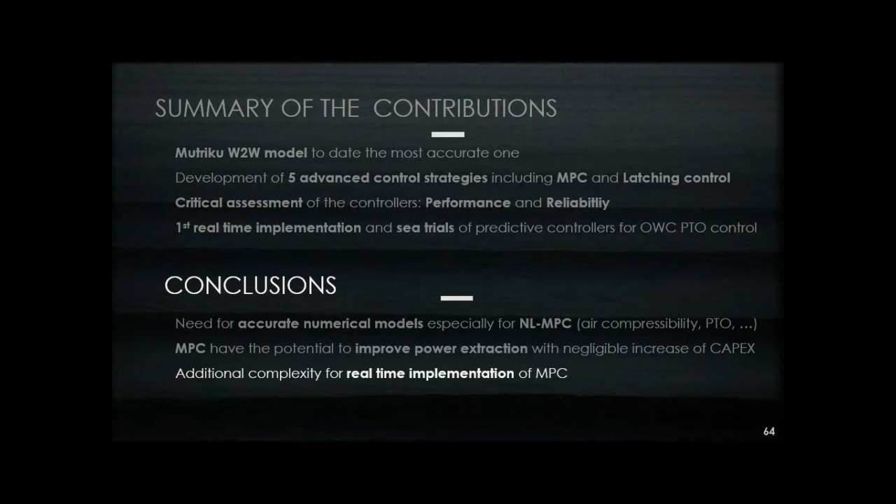And in fact, it has a negligible capex, so we can prove that there is a decrease of the LCOE while using predictive controllers. Additionally, we saw that there is higher complexity when doing real-time implementation of predictive controllers.

Moving on to future works, we know that there is still room for improvement in the wave-to-wire model in the Mutriku plant when we compared the numerical results and the measurements.

We need also to test the predictive algorithms in a wider variety of sea states, because the tests were done only in summertime, so we are not able to see clear improvements in reliability of the constrained predictive controller.

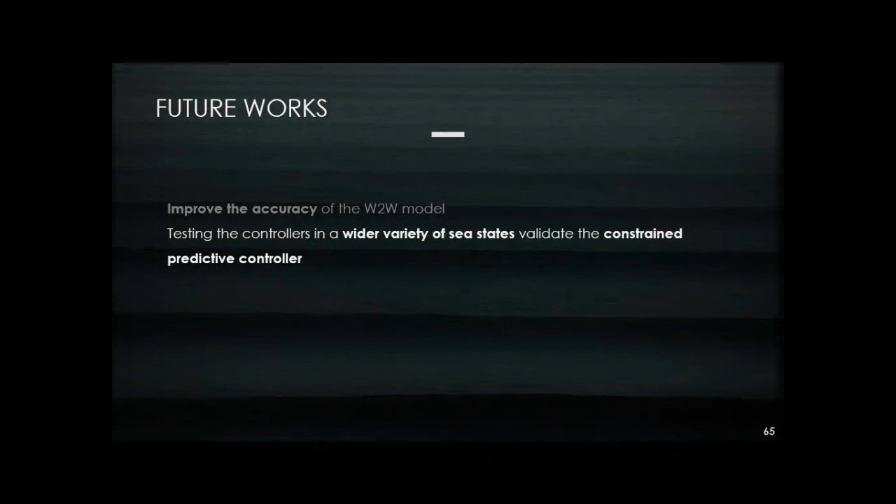Also, what could be interesting is to implement in the optimization process not only an optimization and maximization of power, but a global LCOE optimization, taking into account reliability scores, for example.

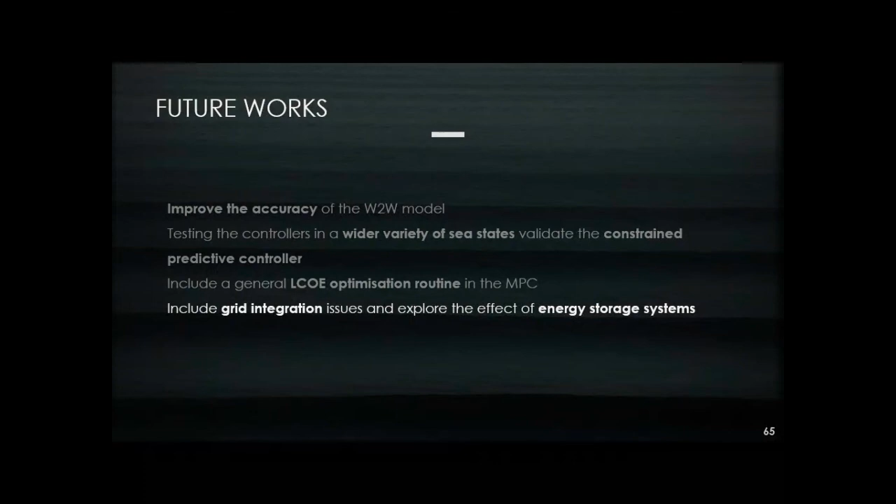Also, what could be interesting is to focus on grid integration issues, because we know that wave energy production will create peaks of power that can generate issues with the grid. Why not think of an energy storage system to try and smooth this power output?

Finally, we had access to a huge quantity of results during those sea trials, and we can think of a way to use these results and artificial intelligence algorithms to try and find patterns, select control algorithms, and get rid of the MPC implementation, the estimation of forces, or the complexity in the implementation.

One final word, if I may.

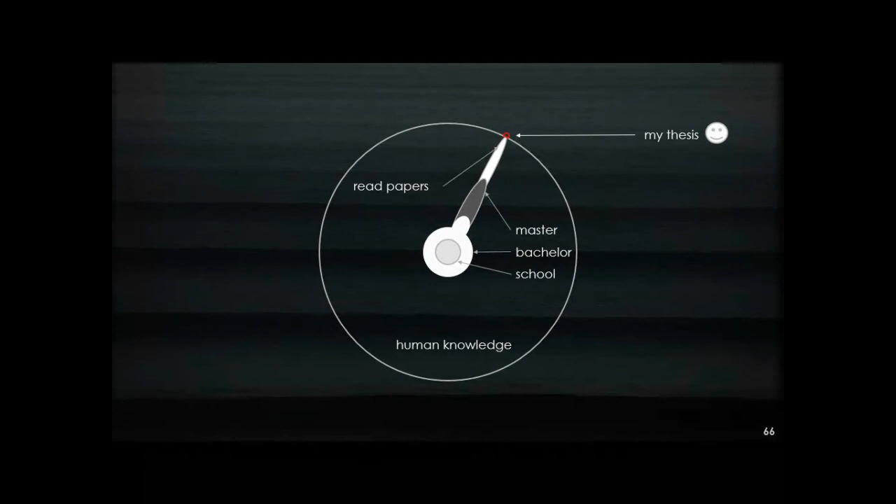When I asked someone to explain what a PhD thesis is, he drew a circle representing human knowledge. At the beginning, you go to school and have global knowledge increasing in all directions. When you enter university, you do your bachelor's and start to specialize in one direction. In the master's, you go deeper, and farther when starting your PhD, reading papers. So finally, a thesis is this little bubble in the human knowledge.

I hope that this work I presented today can help and inspire other academics or people in the field to continue developing wave energy conversion, so we can have a higher increase of marine energies in the global mix.